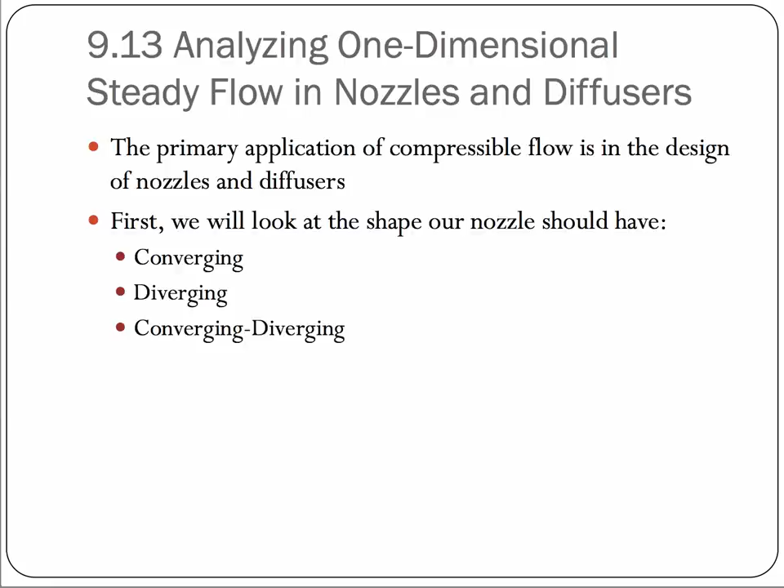So we have some equations. I'm not going to derive these, but it's derived in your textbook, and you can look at that if you're interested. It's pretty much just continuing the derivations that we had done in the previous sections. So the relationship between velocity and pressure is that change in pressure divided by density is equal to the negative change in velocity times velocity.

The important thing here is that as the velocity increases, so if dV is positive, then since I'm multiplying by something negative, I'm going to have dP, the change in pressure, decreasing. Conversely, if this is decreasing, so less than 0, this has to be positive, and so therefore will increase.

If I look at the relationship between velocity and area, so like the pipe size area that it's flowing through, I end up with this expression, which is more complicated, but basically I have change in area divided by area is the negative change in velocity divided by velocity times 1 minus the Mach number squared. And so when I look at this one, I'm going to have to consider how the Mach number changes as well as how the velocity changes.

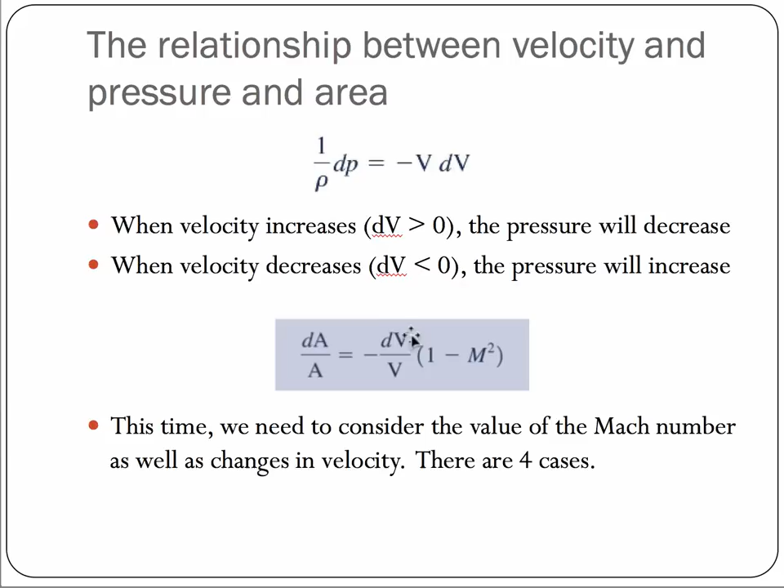So there are 4 cases that we will look at. So first we'll look at a subsonic nozzle. So a nozzle, my purpose is that I'm trying to increase the velocity. If I start out with a Mach number being less than 1, so it's subsonic, then 1 minus M squared is going to be positive. And since I'm trying to design a nozzle, the velocity will increase. And so if I look at this equation, that says that the area has to decrease. So the duct is going to converge. It's going to be designed sort of like this.

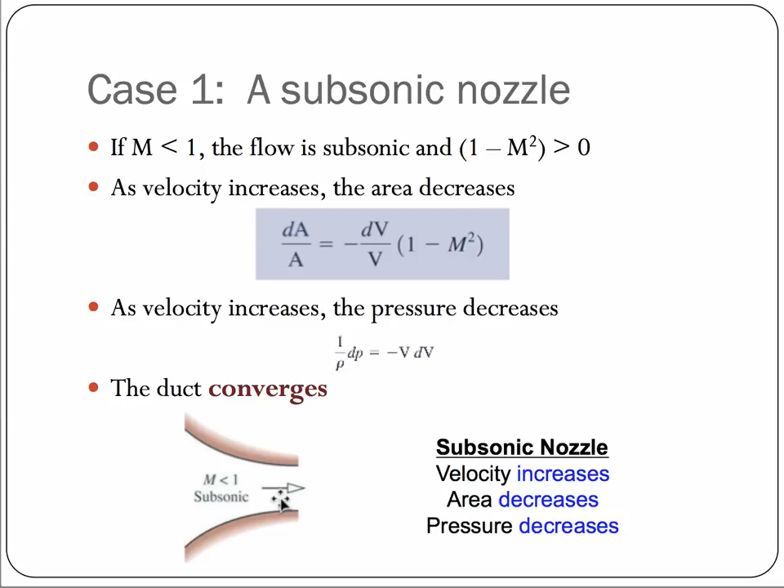Also, if I look at this, the other equation tells me that that means the pressure will also decrease. And so for a subsonic nozzle, the velocity is going to increase. That's the job of the nozzle. The way I'm going to do it is through building an area that's decreasing, and that's going to mean that the pressure will also decrease.

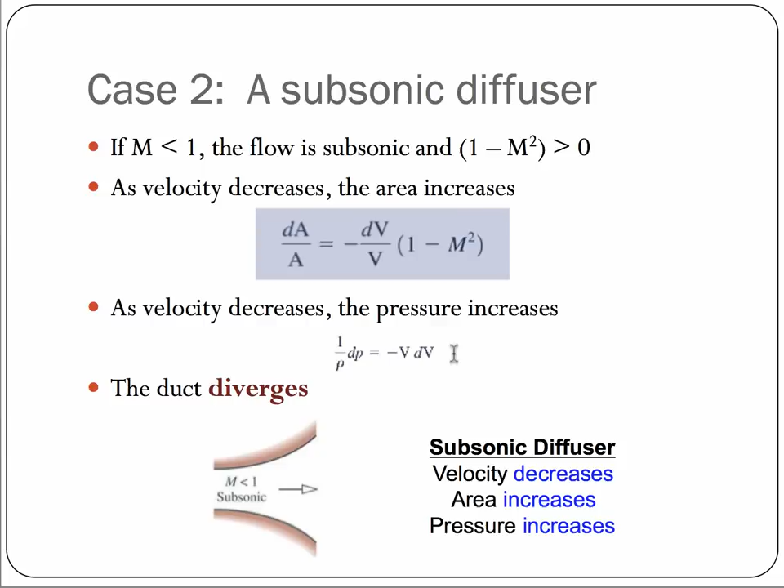If I want to look at a subsonic diffuser, still looking at M less than 1, 1 minus M squared is positive. So now a diffuser's job is to decrease the velocity. So this will be negative times something positive times this negative means dA will be positive. The area will increase. So to build a subsonic diffuser, I want the area to increase. As I do this, I'll also find that the pressure will increase going through this change in duct area.

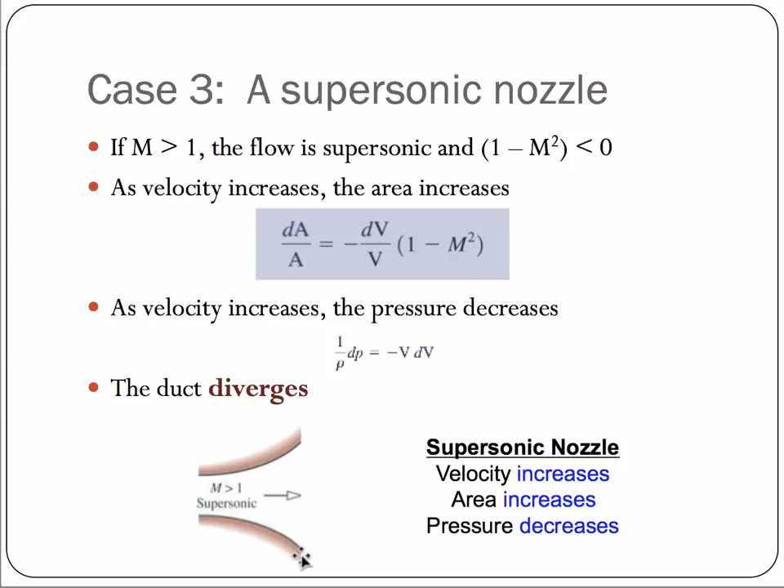Now what about supersonic? So now the Mach number is going to be greater than 1. 1 minus M squared will be negative. So negative, negative. If I increase the velocity as I would in a nozzle, that means that the change in area has to increase. So it is counterintuitive, but a nozzle for supersonic flow will increase in area, but the pressure will still decrease. So the duct is going to diverge, but because the flow is supersonic, this is going to actually increase the velocity.

If I want a supersonic diffuser, therefore, I'm going to have the opposite effect. The area is going to decrease, so supersonic flow through something where the area decreases will actually decrease the velocity. But the pressure will increase just like as it did for the subsonic case.

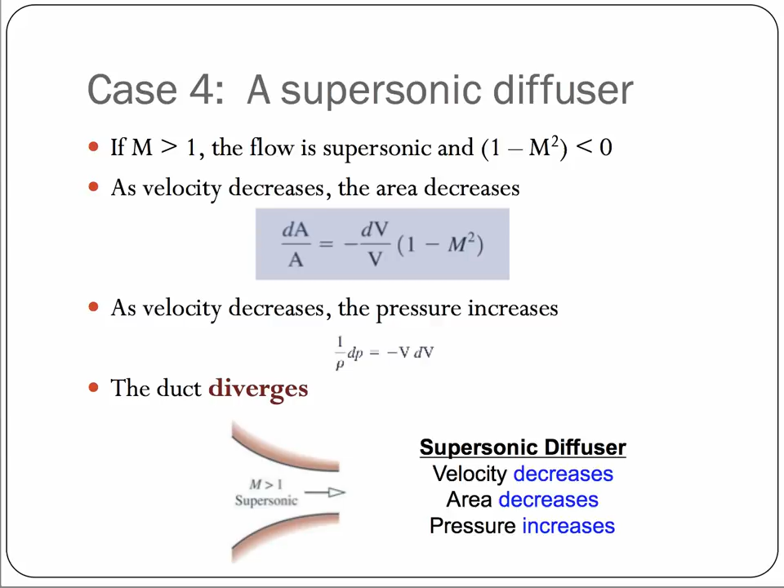Now where this gets interesting is if you put a converging and a diverging unit one after the other. Now let's consider the case of subsonic flow. So M is less than 1. And so my first thought is, and maybe this is true, if M is much less than 1, the velocity is going to increase going through this nozzle. But if it continues to be less than 1, then when it hits this narrowest point and then moves into the diffuser section, the velocity increased, but now the velocity will decrease. The net effect is what we're calling a venturi in many cases, sized so that the increase and decrease counterbalance each other.

That's interesting, but what if, as the velocity increases, I reach the point that it becomes sonic? So let's just say, for the sake of argument, that right here at this narrowing, the Mach number is 1. So it's subsonic, it's increasing, and it just barely reaches the point of being sonic. Slightly over, 1.001. It is now supersonic. What will happen as it goes through this diffuser?

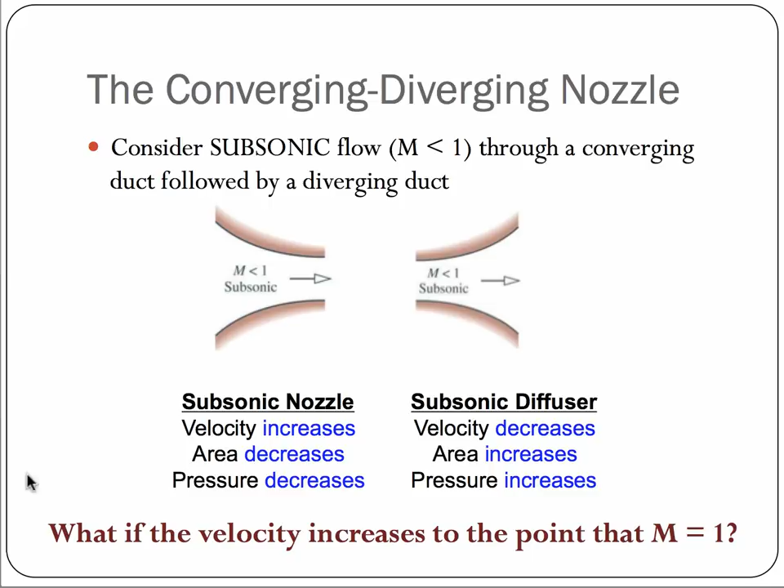So most of you probably got this right. Yeah, the velocity is going to increase, so it's increasing along here. I get to M equal to 1, and now it's going to continue increasing. So going through a convergent-divergent nozzle, when I'm in that transonic area, when the Mach number is very near 1, if it gets to 1 at the throat, the smallest area here, then it will continue to increase in velocity as it moves through.

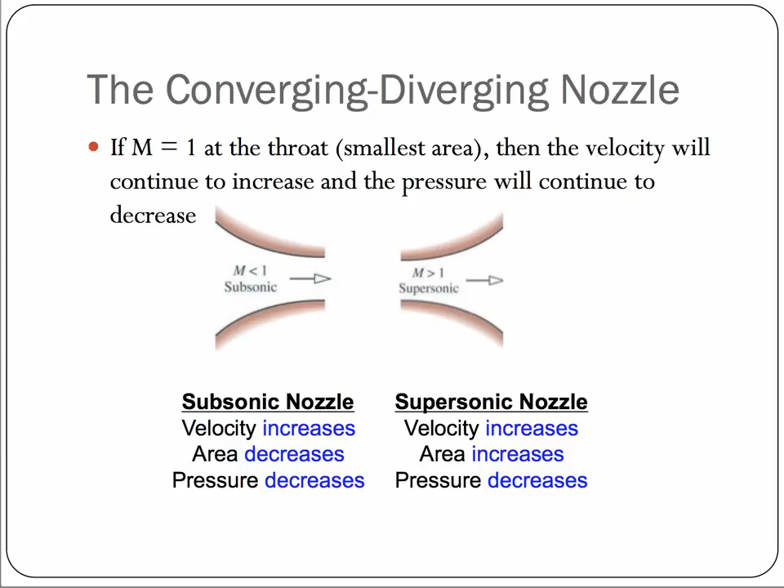Now I can also have started with something where it was supersonic coming in, and in that case, if I build it in this direction, I will have it diffusing, right? The velocity will slow down if it comes in as supersonic. And if I can choose correctly so that I get M equal to 1 right here at this narrow opening, and then put a diverging piece here, it's now subsonic and will continue to decrease the velocity.

So at this point, I'm going to break the video. I'm going to come back and look at what's going to happen when we do back pressure with these various styles of nozzles or diffusers.